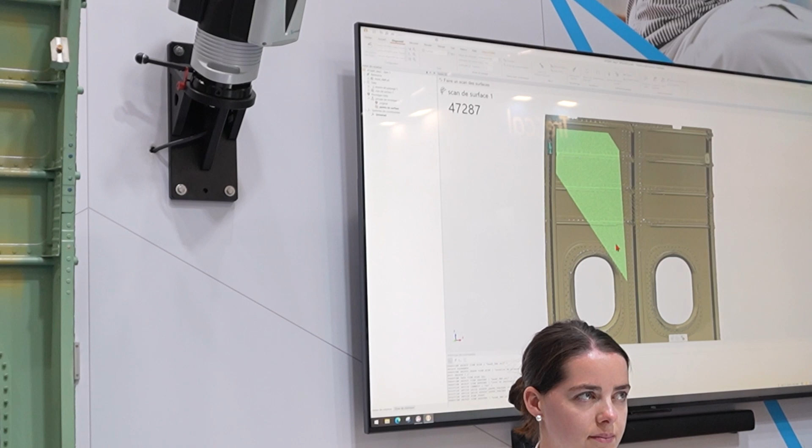And by mirror, you can catch it here - you see the beam? Perfect. On the screen here, you see the point clouds arriving, just behind the woman.

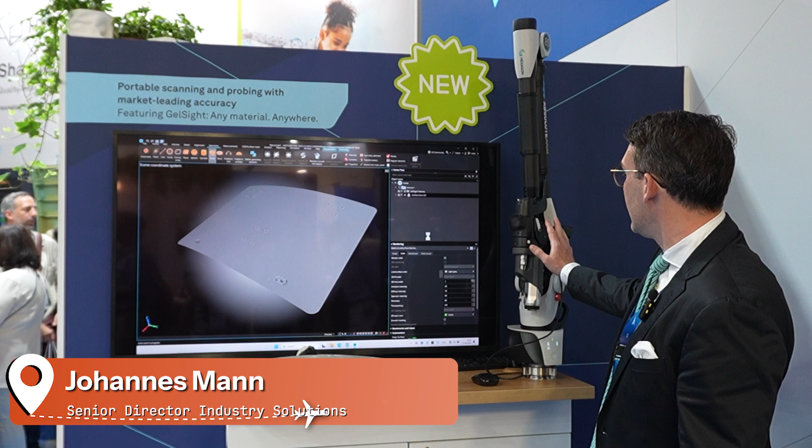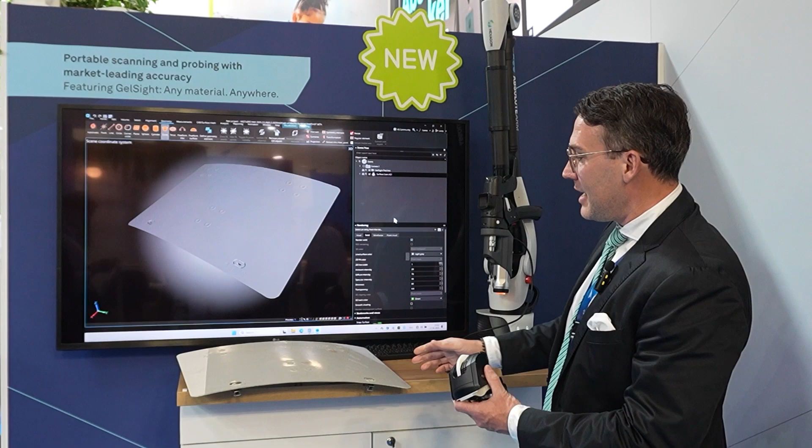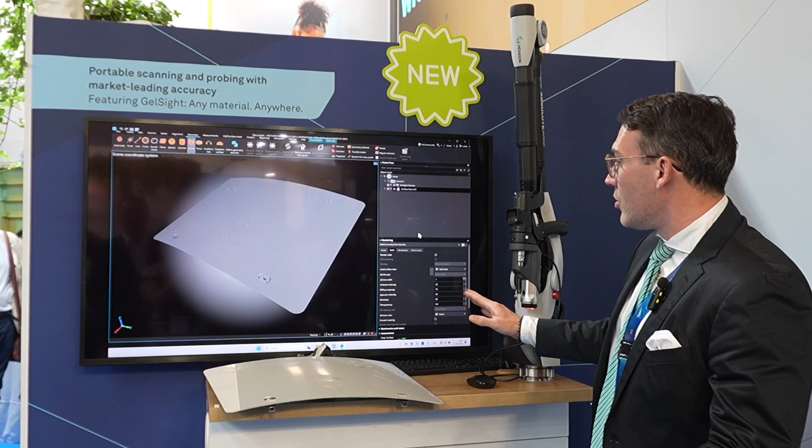What we're showcasing here is our brand new integration of the GelSight technology, a partner of Hexagon, onto our absolute measuring arm. In the morning, the first step was taking our well-known AS1 onto our measuring arm and acquiring the whole piece - that's what you see in gray in the background. This scan would be by far sufficient if you want to do metrology and check the shape of the part, so this works. But when it comes to surface or even defect detection, the point cloud and the derived polygon mesh reach their limits in terms of precision.

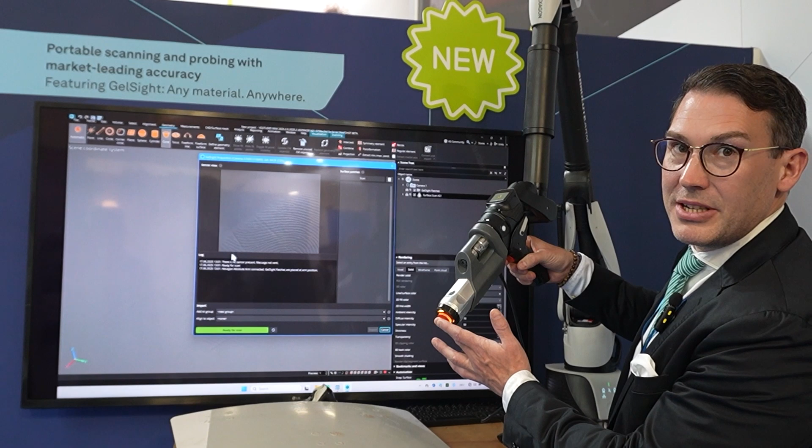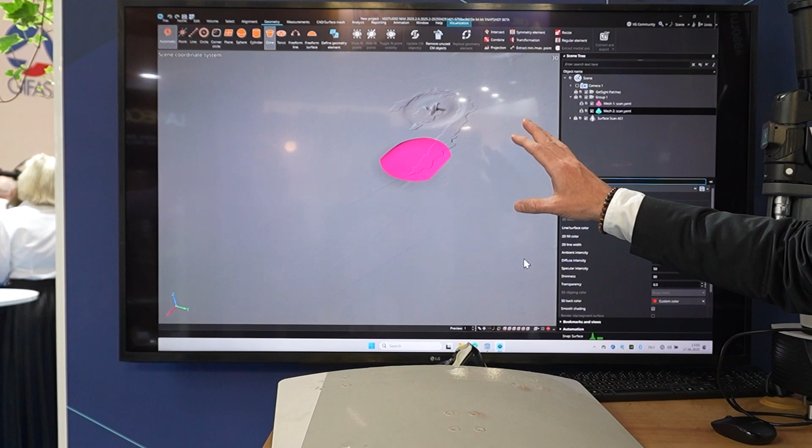That's the reason we implemented the GelSight sensor on our solution. It's more or less like a digital finger - if I touch it, you see directly my fingerprint on the screen. By having it on an arm, I can easily acquire information which isn't easy with a surface scanner. Because it's mounted to our absolute arm, we don't only have surface information, we also have the absolute position, making it possible to spot exactly where the points are. So you have the surface scan merged with the surface information from the GelSight. If I zoom out, you see exactly where we took the samples.